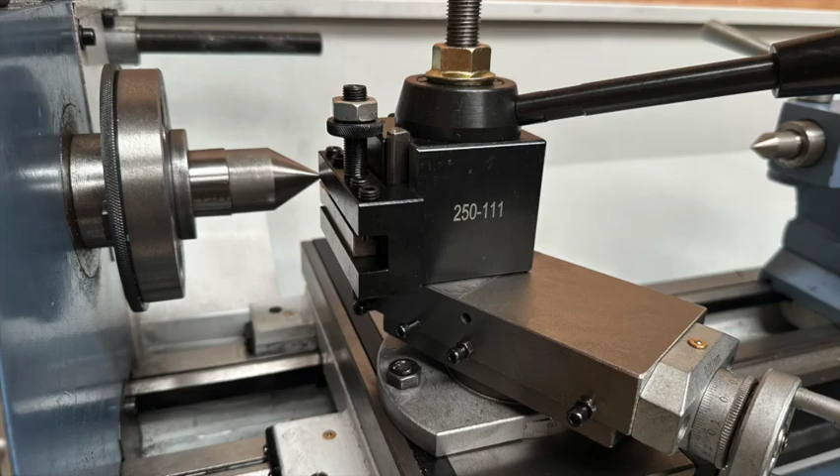Okay, this is my new lathe. I've had it for about a week. Had a lot of fun, put oil everywhere, turned a lot of steel into scrap. Had a lot of fun with it.

But one thing I've learned pretty quickly is that this tool post that comes with it is a pest, particularly for beginners. I think if you could just get your tools in there once, shim them up, and maybe if you had more of them so you could take them out and replace them, then that might be a reasonable solution. But for me, I've had a terrible time with it. I've broken a few pieces of high-speed steel every time I regrind it and put it back in. I have to get it back on level with the lathe, and that means shimming again, and it's just a real pain. Do that 10 times and I'm sick of it.

So I know now that I want a quick change tool post. Fortunately, I bought one, but now I need to make it fit. There's a bit involved with that, and like a lot of these things, you end up going down a rabbit hole in order to achieve what you need to do. So let's have a look what the problem is.

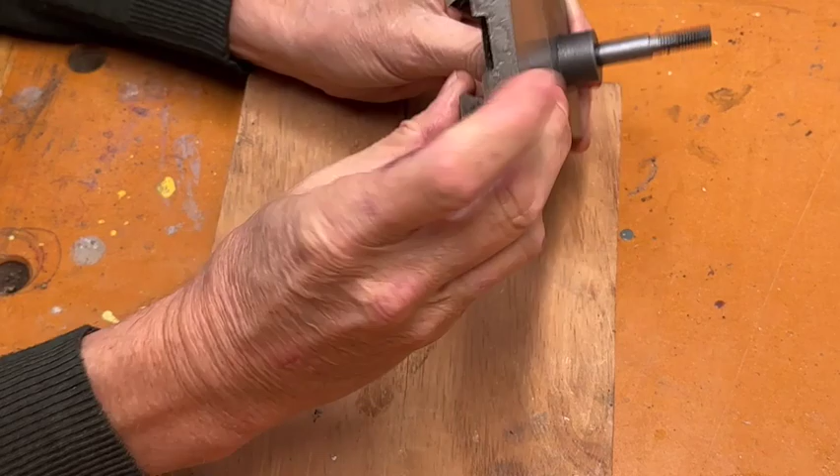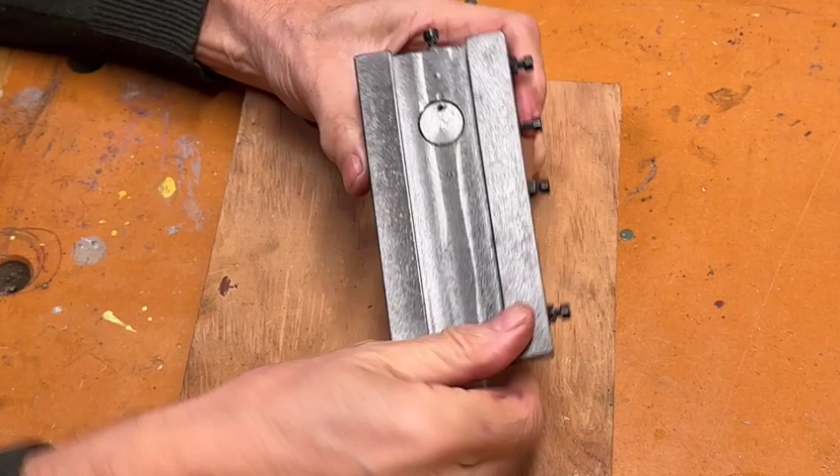Okay, so I took the compound off, and here it is, complete with the dovetail underneath, as we can see. Now the tool post that it comes with obviously registers on this piece here, this cylindrical piece, and the post through the middle is 10 millimeters in diameter, and it's necked down to a smaller thread. Under the bottom here, it's been recessed. That's a 19 millimeter diameter recess. It goes in 4 millimeters, and that's obviously coming into the base of this. That's taking some of the strength out of it.

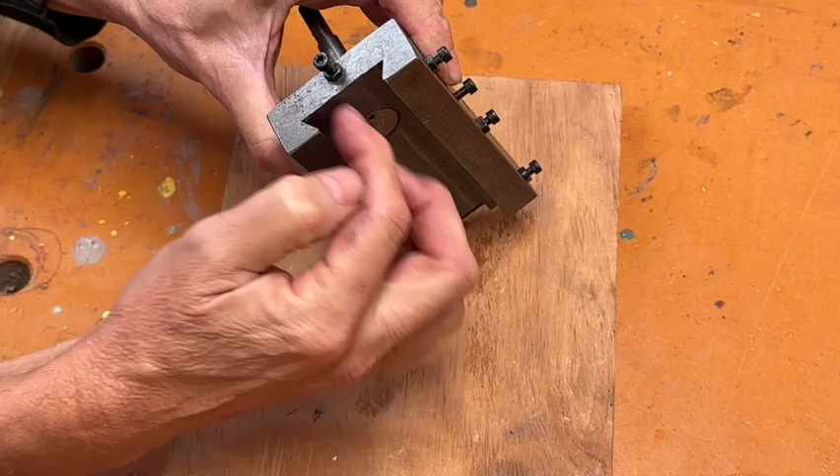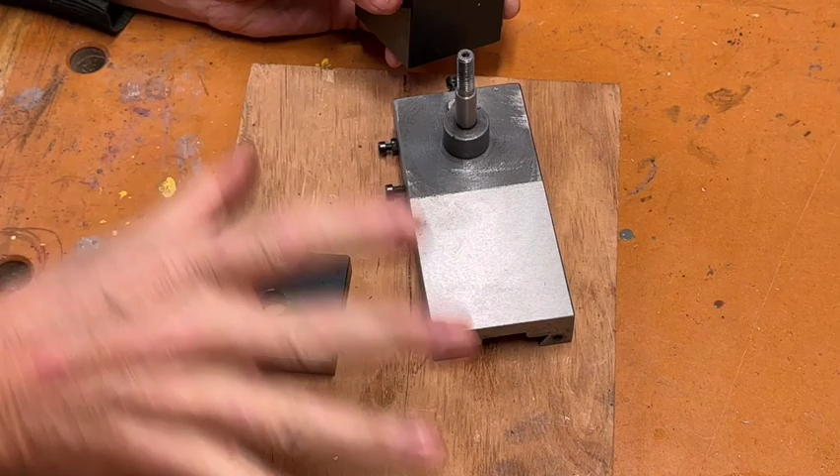Now, the tool post that I've bought is the AXA. This is the correct one for the size of the lathe that I have. Now this comes with this piece that you're supposed to turn into a T-nut for a compound slide that has the ability to slide the T-nut in. This is obviously too small and it doesn't come in that setup. So that there for me isn't required.

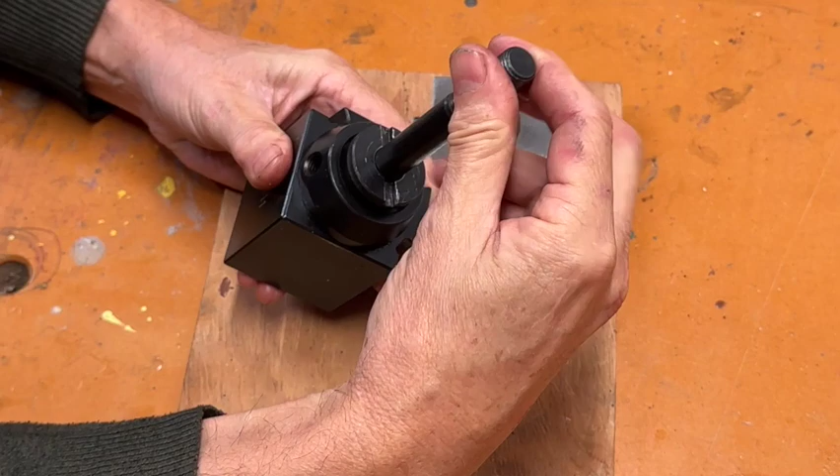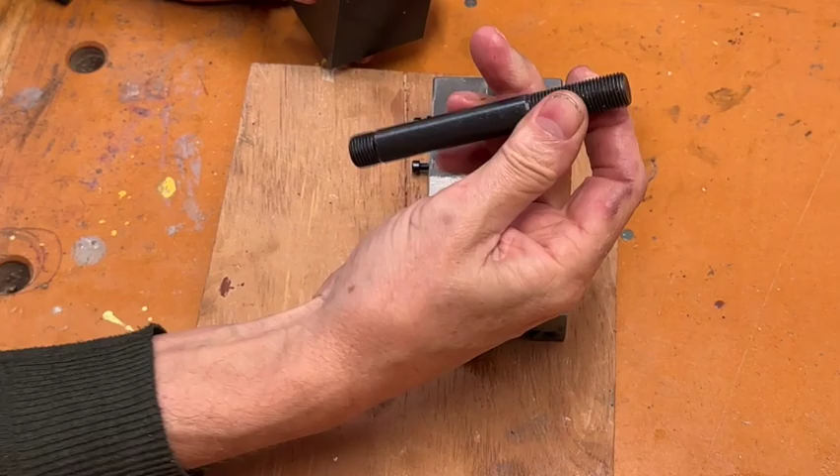I've undone this a little bit so it's not complete, but we can see that the main post down through the middle that the tool post is both clamped down with and registers with is considerably thicker, and in actual fact that's 9/16. So this, even though it's a Chinese copy, is a copy of an Aloris tool post, which is an American company, so therefore this is imperial measures or American measures. The thread is a 9/16 18 thread.

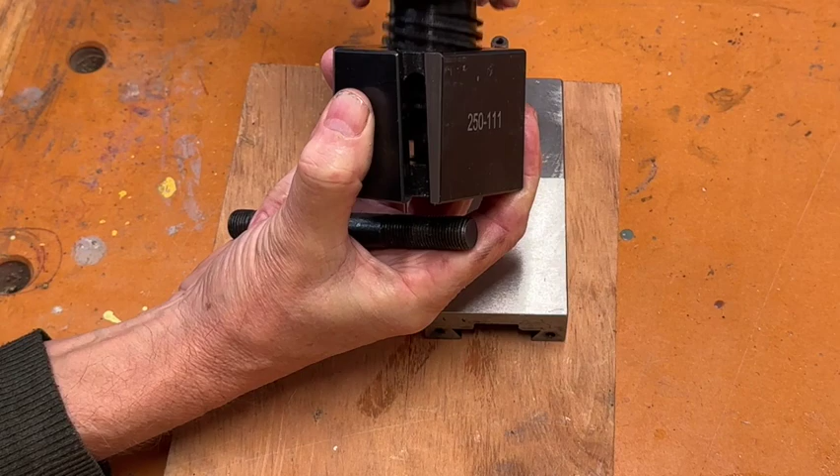So there's a few things that come with this. With the bottom here where it screws in, hopefully you can see that, this threads all the way to the bottom and it holds this spiral piece in that the sliding dovetails work against. So the center piece has to screw into the bottom.

So I can't take away that in order to make room for that, so it won't sit on it. So this, as it stands, sits proud. This is 22 millimeters, I think, and that's not. I can't remember the size of it, but you get the point. So I can't take this away, so this has to come off.

Now, this obviously is what it would register on as it stands. It's not great, there's a little bit of play there, but it's fine. I don't know if it's really an issue anyway. I don't know if it really needs to register on it, but I figure that if I can make it that it does, then why not? So that's my standard thinking at the moment.

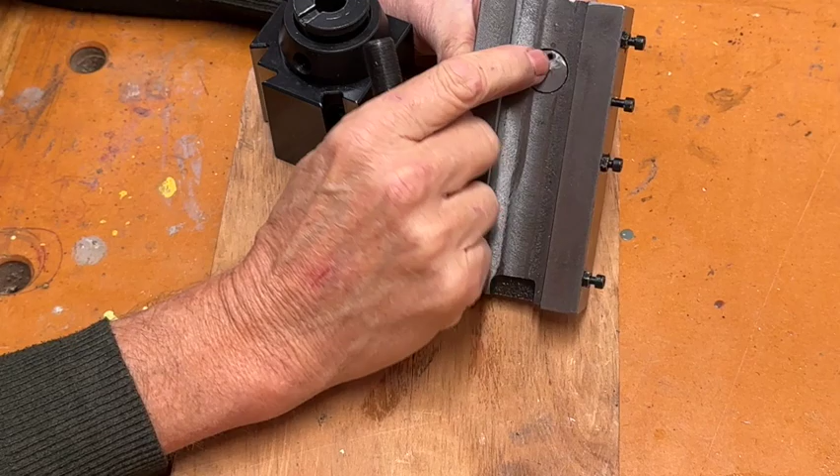I'm going to make a bigger hole for this, make a new pin. So the hole will be bigger for that to fit through. And then because that's 19 mil and this is 9/16, which is close to 14 millimeters, there wouldn't really be enough. This roll pin here is designed to stop that rotating, obviously.

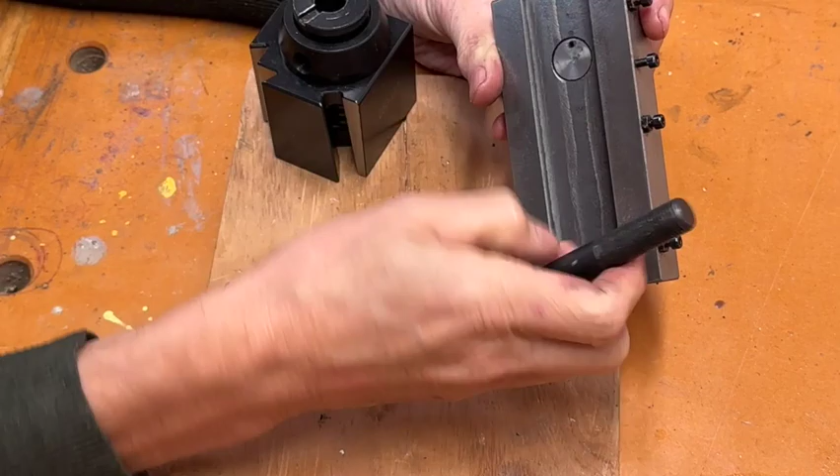So what I really need to do is make this recess here bigger, and I'm going with about 24 millimeters. It'll just give me enough room. There's about 35 in between the bottom of the dovetails. So I'm going with about 24 millimeters, and I'll show you why in a minute. And a new pin that will go through, and everything else will be the same.

The only other difference I'm going to make is I want this to be 9/16 because it needs to fit inside here and register on it or thereabouts. But the rest of my lathe is metric.

Living where I do, everything's metric. Everything else on the lathe's metric. I want to just neck it down very slightly and put a 14mm fine thread on it.

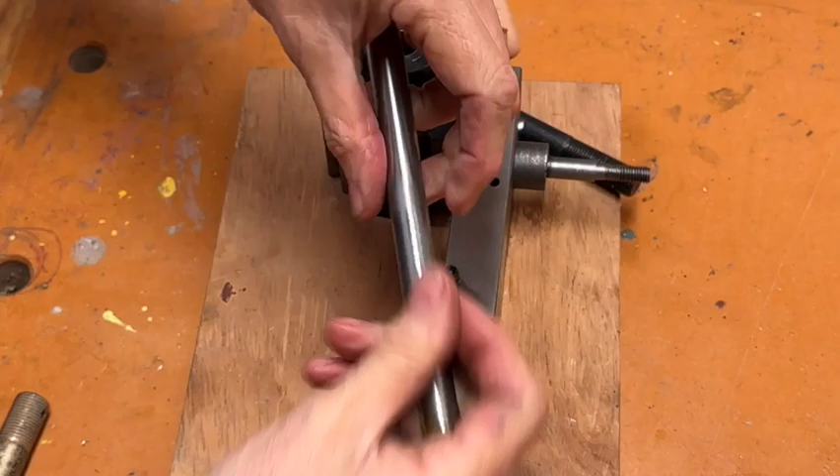Now what I haven't shown is I've jumped ahead and started making the pin. I haven't threaded it yet. This started out as an old bolt.

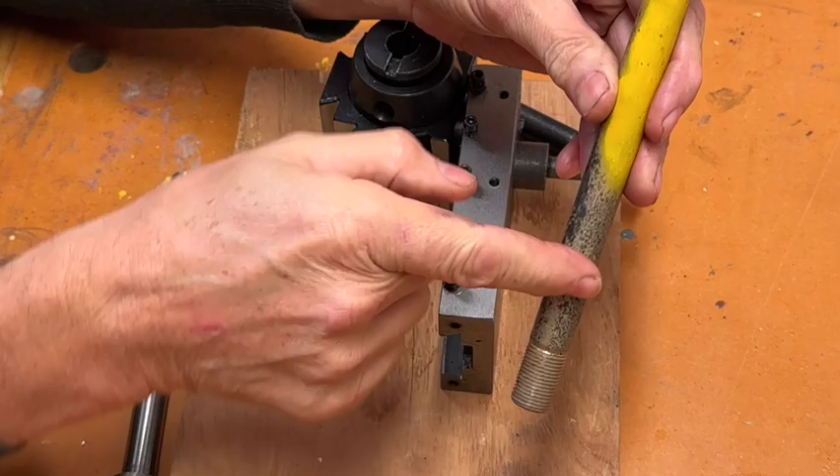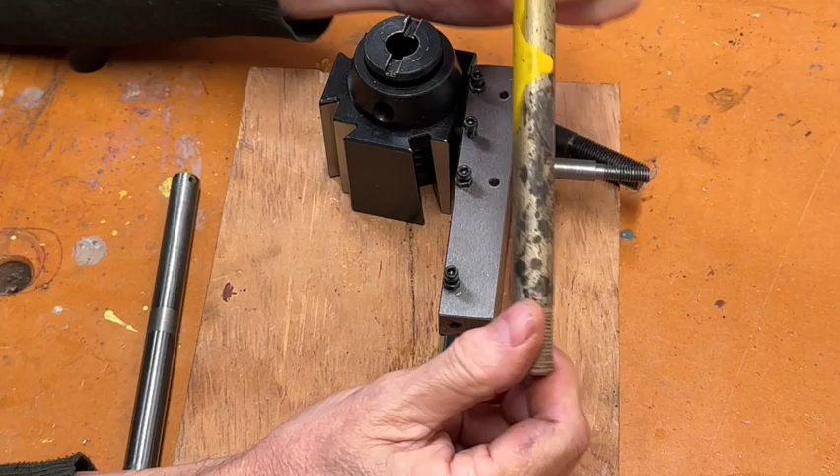This bolt, just for interest's sake, used to hold the wing of an aeroplane on. When they took the wings off and pulled this pin out, the person who did it used a screwdriver or some form of lever to lever the pin out. Before it's inserted back into an aeroplane, it needs a magnetic particle inspection to make sure it's still suitable. This one failed. I've got 5 or 6 of these, and they'd all failed.

So I thought, well, that's a great bit of material I can use for something else. And as it turns out, it worked out quite well for this pin. So that's where my 24mm comes from. When I round that off, just take the corners off, it leaves me with about 24mm. And that now is 9/16 to go through the middle of here for this to sit on. It sits quite nicely with very little slop.

In fact, it's slightly better than the pin that it came with. I'm just waiting for a new nut to turn up. I don't have any thread wires at the moment either. This is the problem with starting with these things, is you don't have a lot of stuff. So I'm just going to cut it and make sure the nut fits. Even though that's probably not what you're supposed to do, that's all I'm going to do on that.

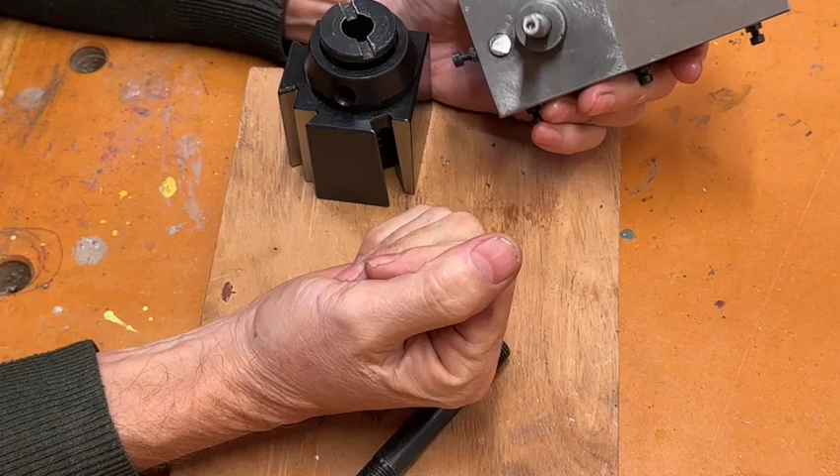So the problem now is, how am I going to do this? Obviously, if I take this out and mount it onto the faceplate in my lathe, I don't have a tool post, so I can't do anything apart from drill a hole. Of course I could take it to somebody to do it for me, but where's the fun in that, right?

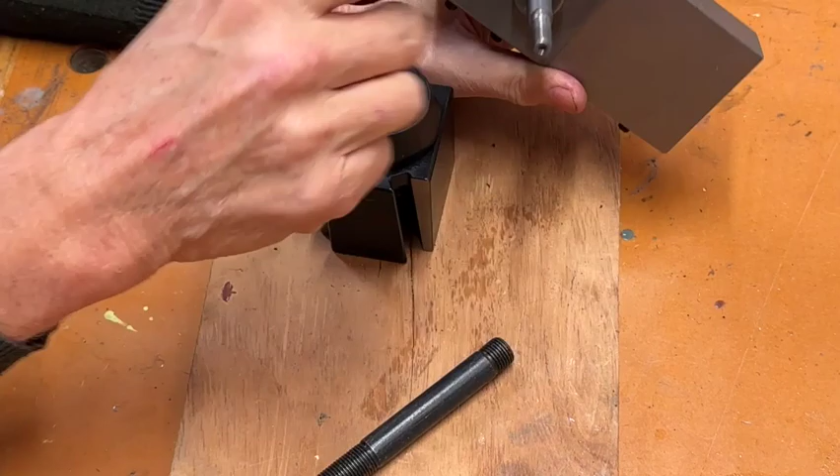So I've seen a few people on the internet who have done away with the compound slide in an effort to increase rigidity. That made me think it would be an ideal thing to make first, because I can make that relatively easily, and then I'll have somewhere to mount my tool post, so I'll be able to work on the compound slide on my faceplate, machine this down myself, machine the recess myself, and make it all fit together.

It was all getting a little bit too complicated for my head, so I decided I'll put it onto CAD on the computer so I can have a decent look at how all this is going on, and then I can formulate a plan to move ahead. So let's go to the computer and we'll see what I've come up with.

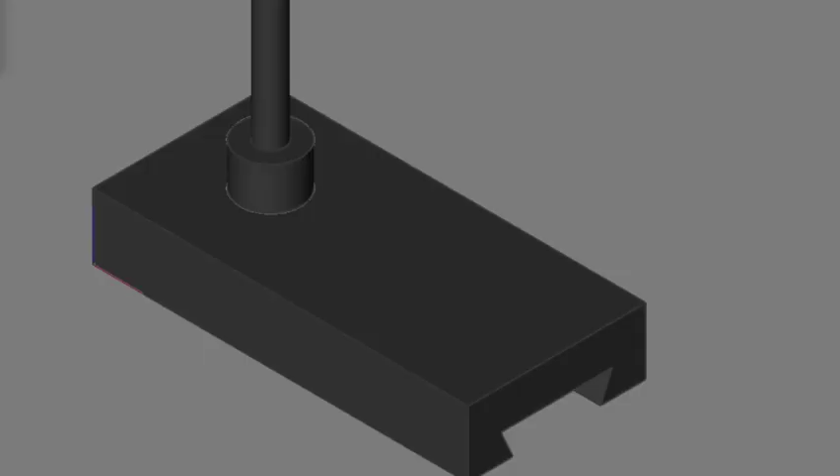Okay, so here we can see the compound slide as I've drawn it up. The pin's now removed, and we can see how I'm going to shorten the registration post, if you want to call it, down to about 2.5mm.

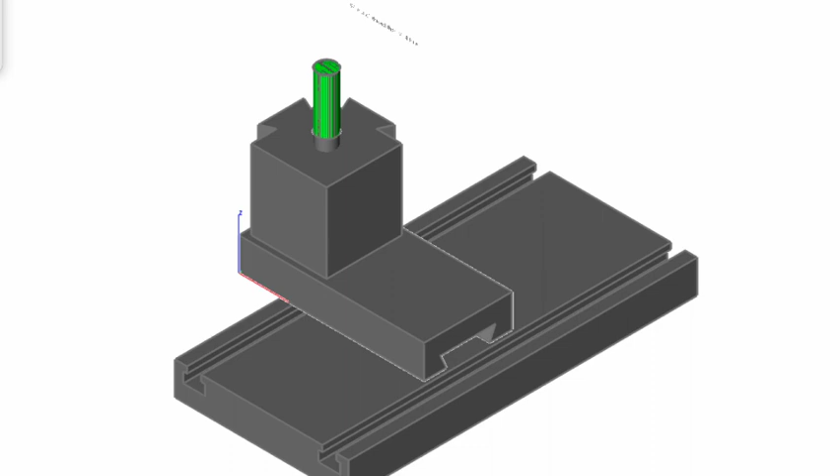Okay, now this is what it's going to look like completed, and the cross slide's in there for comparison. Now, obviously with the compound slide removed, I'm going to need some form of tool post. So let's remove some of the components and we'll see what I've got planned to build a replacement for the compound slide.

So here it is again with the compound slide removed. Looking from the side, we can see the cross slide and the quick change tool post, and we've got about 50mm, in fact just a fraction more than that, in between. So my plan is to split that up and make 2 pieces.

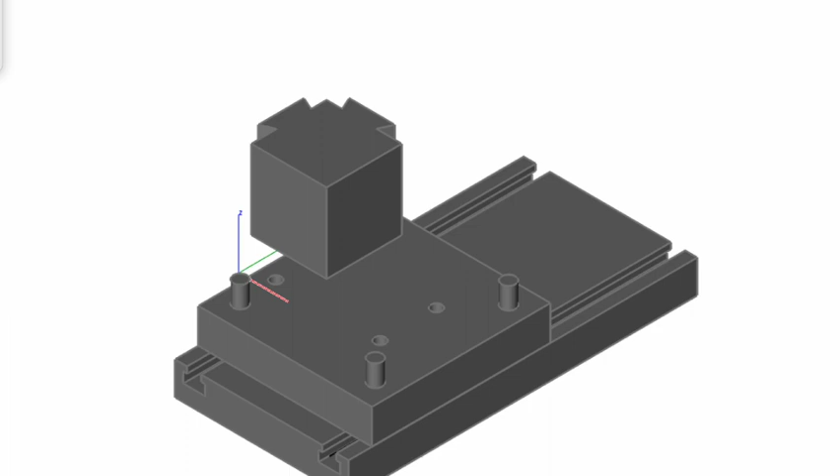So here we have a bottom piece with the holes for attachment, and that'll be joined with another piece above it. So we've got 4 corners that have attachment pins going through, and they're basically just bolts that are adjusted to fit as T-nuts.

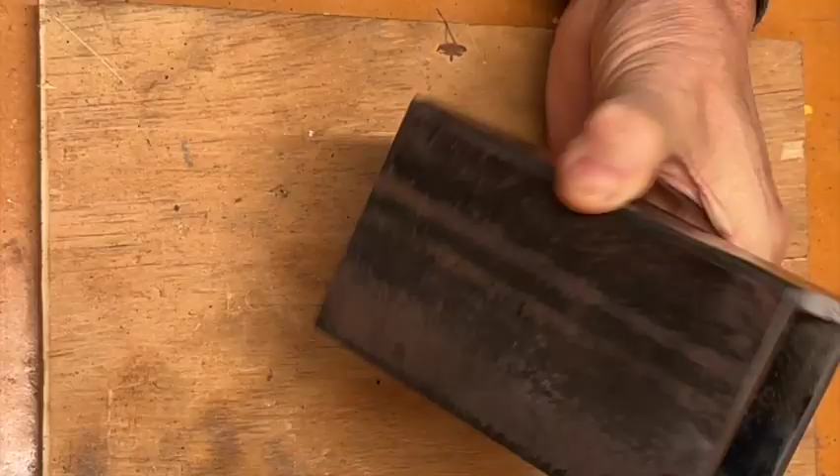Well, that was the plan until I realised that I couldn't get any 25mm steel very easily. So I'm just going to redesign that slightly, but for now I've just made this temporary tool post holder, I guess you'd call it, and I've just used 5mm angle and welded it together.

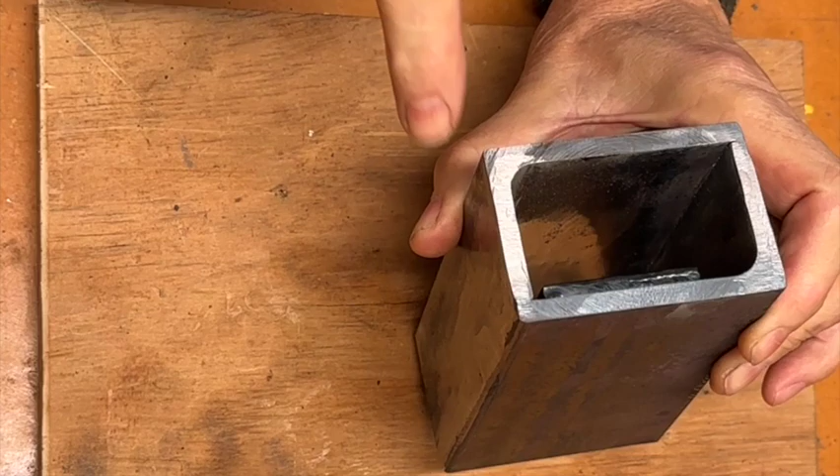So a few learning aspects there. One of them, my welder's not the gruntiest, so I had to pause quite a bit on the welding, and I'm not a welder by any stretch. You can see that I didn't quite get the penetration that I would have liked in here. In that corner there's down to about half, which wasn't that great. Most of it's actually not bad, but that was down a bit, and I also ran out a little bit of argon just towards the end, so got a little bit of spotting there.

I welded a couple of plates in here just so when I drill and tap that, it's got something to bite into rather than trying to sit half in and half out. So that should be okay, I think.

How rigid this is going to be, I don't know. My intent, after I've drilled the holes for it to mount on, is to also weld in a piece kind of like that, it'll be further in. I think I'll probably have to angle that and just put that in there and weld it in, just to give it a little bit of rigidity, sort of in that plane, whatever plane that might be.

I tried putting it in the lathe and indicating on the 4-jaw chuck to get this face even, but I realised the welding had hardened the edges, so every time I got out to the end points, it'd smash the tips off the high-speed steel. And I've also been told that it's not a good idea to do it with carbide because carbide's brittle anyhow.

So that didn't work. Anyhow, I got it a little bit truer there, and I really need to cut about 5mm off this end here and reshape it. So I'll just have to do that with the angle grinder. Like I say, it's only temporary anyway. I'll tidy it up a little bit as time goes on, but for now, that'll just have to do.

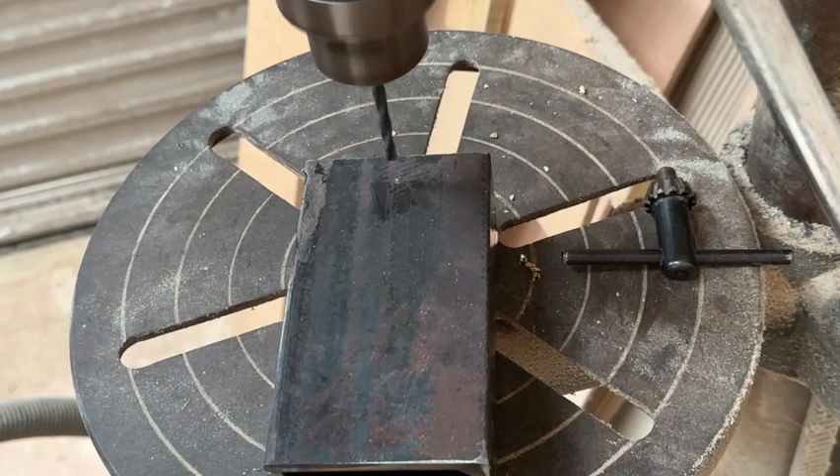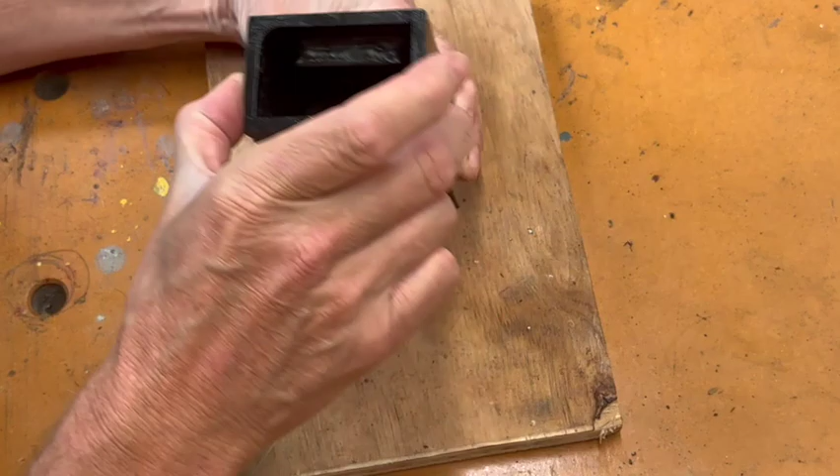Okay, so this is a little bit further down the line. I've welded this up, I've got this piece in the back welded in. I just sprayed some black on there because I've just been away for a few weeks and I just didn't want it to corrode. So I put this in the lathe and the 4-jaw chuck just to level that up and true it up a bit.

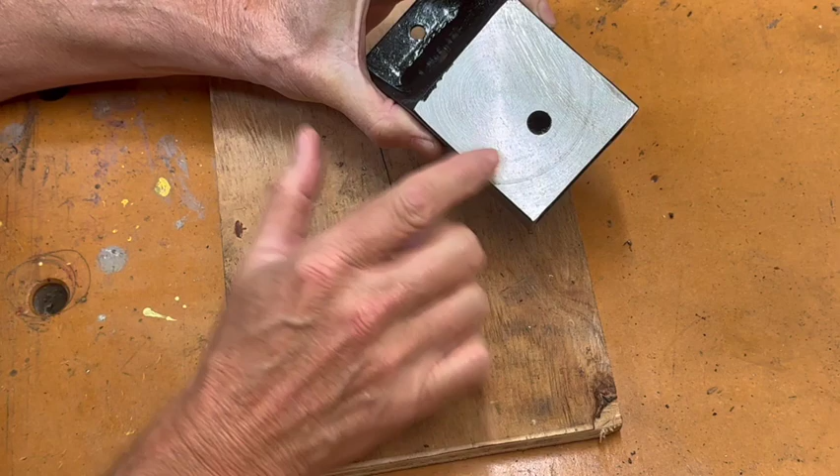Had a little bit of trouble with these corners because they were quite hard. So I just left a few small marks on there, but generally the finish isn't too bad for what it is. Bottom I haven't done yet.

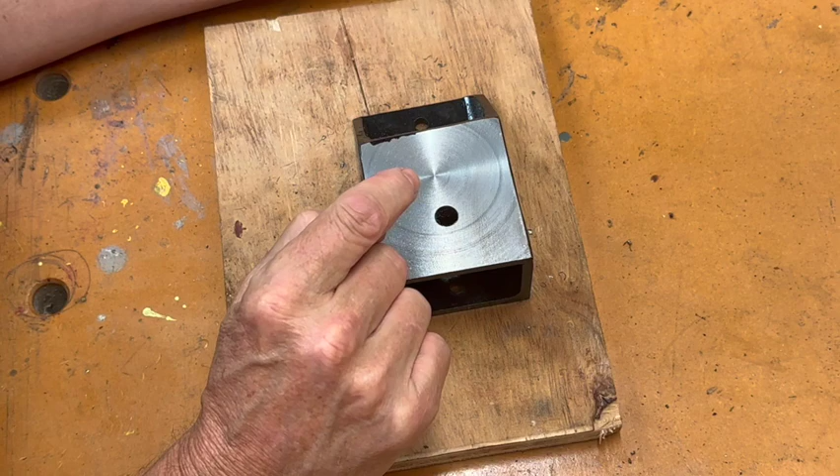Not quite sure how I'm going to attack that, but what I am going to do in here is tap that for a 10mm, M10 bolt and just cut it off, so I've got a small pin because that'll fit into a recess in the cross slide. In the top here, of course, I need to tap this now for a 9/16 18 so I can put the tool post centre pin in, and I think that will be reasonably rigid.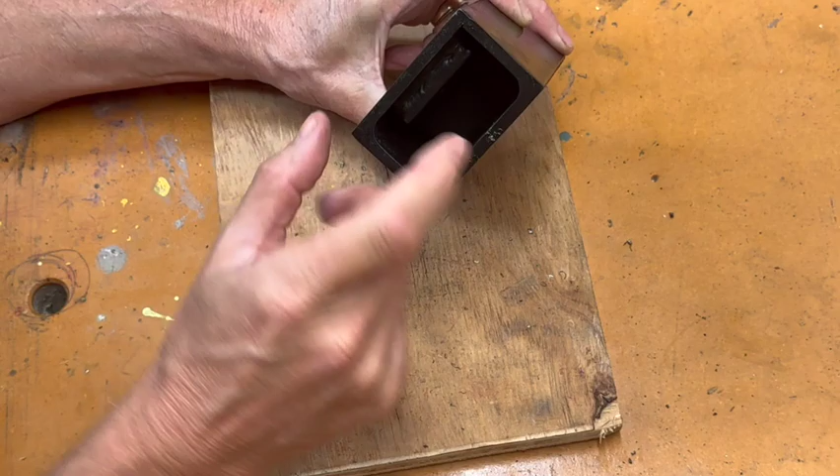I'm not quite sure. In the front here it's still a bit hollow. It's fairly solid and heavy, but it may lose a little bit of rigidity with that. It'll be a little bit difficult to do much with it just because the holes that mount it onto the cross slide will be in the way with the nuts, so I can't really do a lot with it. I could perhaps put a small piece in there that might improve it, but again, this is really only a temporary solution, so we'll see how it works out.

It should give me enough rigidity to get the job done just to fix the compound, and so I can put the tool post on there, but we'll see how that works out. In the meantime, I'll get on with tapping that and continuing on.

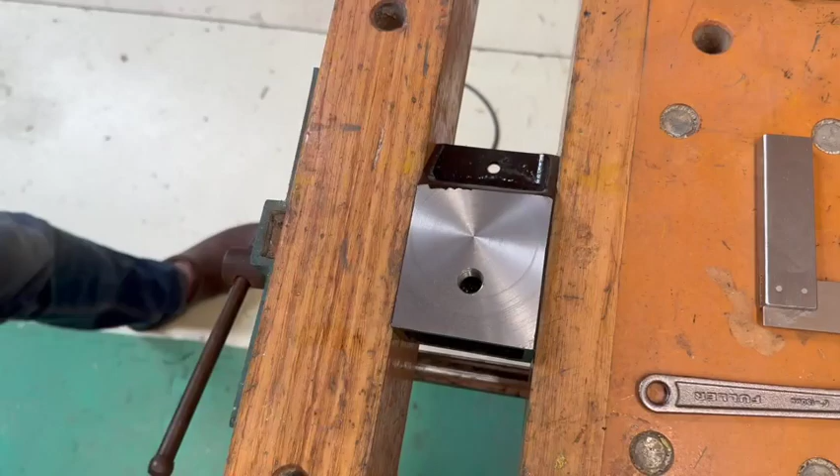It looks like that'll work. Okay, so here we are now, and I've mounted the compound to my faceplate and made a couple of little pieces of fixturing equipment there. So I've got this strap here to hold it in place. I've got it approximately in the middle at the moment. I'll dial that in when it's sitting on the lathe. And I've just made this little piece of strap here with a cutout just to stop this from flopping around.

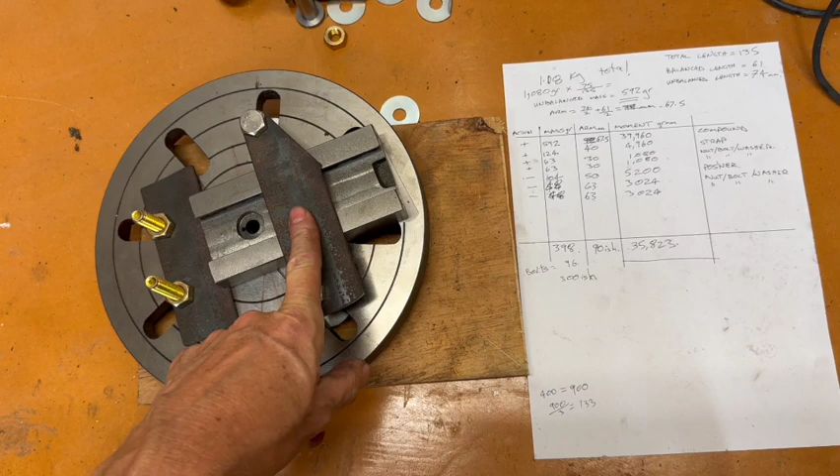Now, of course, the load of this, when it's spinning around, is going to want to try and pull itself out. So I'm going to have to run it fairly slowly. I can't really come up with a simple method of holding this in without adding even more weight on this side. So I'm just going to see how I go. I'll just run it slowly and make sure it doesn't jump itself out. If it looks like it's going to move, then I'm going to have to change the system. But this is the start.

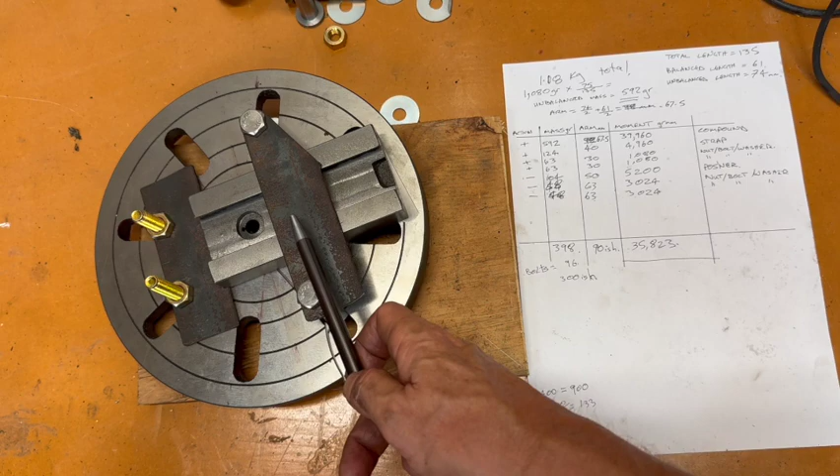Now, of course, I have to balance it. So I've just come up with this old-fashioned spreadsheet. I've measured the weight of the compound and put that up there, 1.08 kilograms or 1,080 grams. I've measured it and got an approximate position. Now, this side of the center and the same out here is balanced. So I'm really only interested in the weight from about here out to the end of the unbalancing weight, if you like, along with this strap. And this strap here is helping things because it's on the other side of the center.

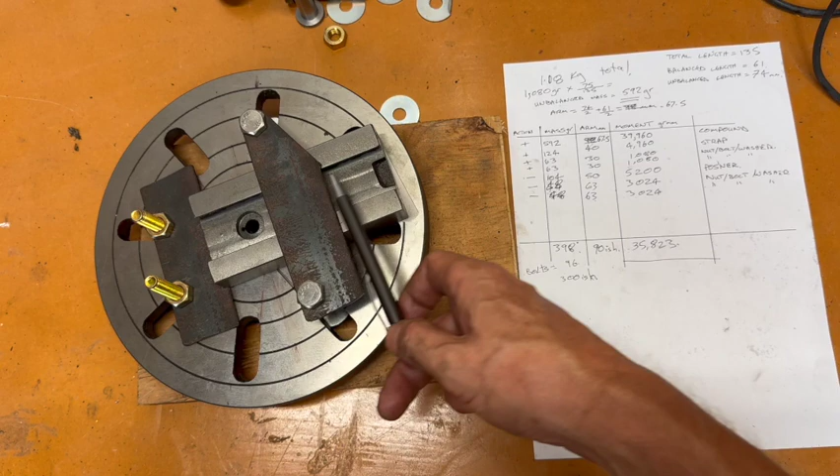So this sheet here is pretty simple. It's just got the mass of each of the components and the arm from the center of gravity approximately, and I just figure out the moment so we can either add or subtract depending on which side of the center of gravity it's on. Come out with the total moment, and then I'll be putting something out here, about 90 from the center roughly. And so I need about 398 grams out there, which is just dividing the moment by the distance.

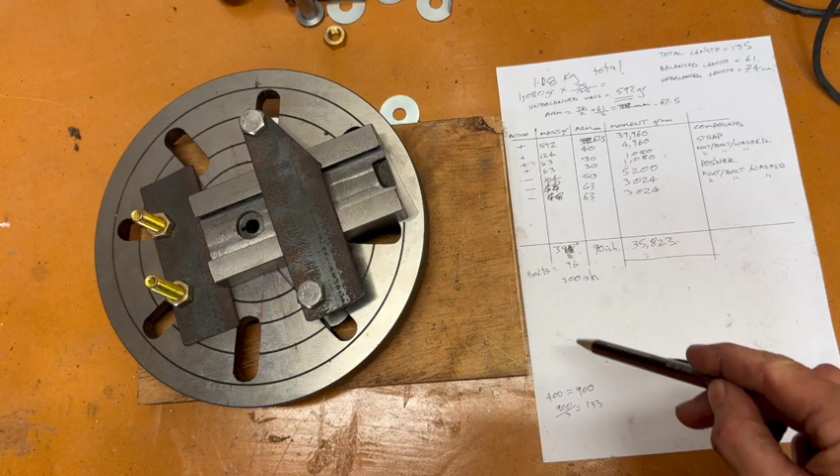Now the bolts and the nuts are going to be around about 96, so about 300. I'm not trying to send a rocket to the moon here, so it doesn't really matter. I just want it approximately balanced so it doesn't try and shake the lathe off the bench. So I've got a piece of material I'm just cutting at the moment. That should give me around about the weight I need, and I can bolt that out there, and then we'll move on to the lathe and get it all dialed in.

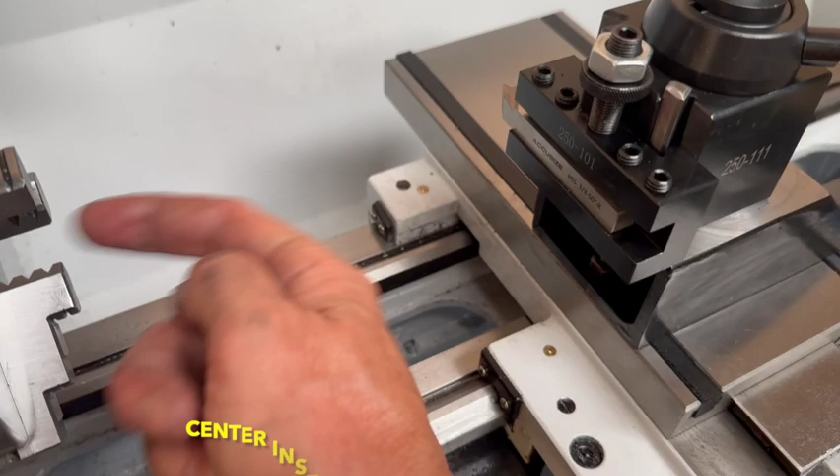Right, here's my temporary tool post in position, and I have the center pin in here, which you can't see, but it's holding that in place. I've got that squared up and mounted the tool post on it. I've also put in a tool here and measured the height. I put the center in the spindle and got the height off that for now, so that'll do. This is only temporarily in place anyway. The next tool I'll be using will be the boring bar to get the center of the compound slide machined out.

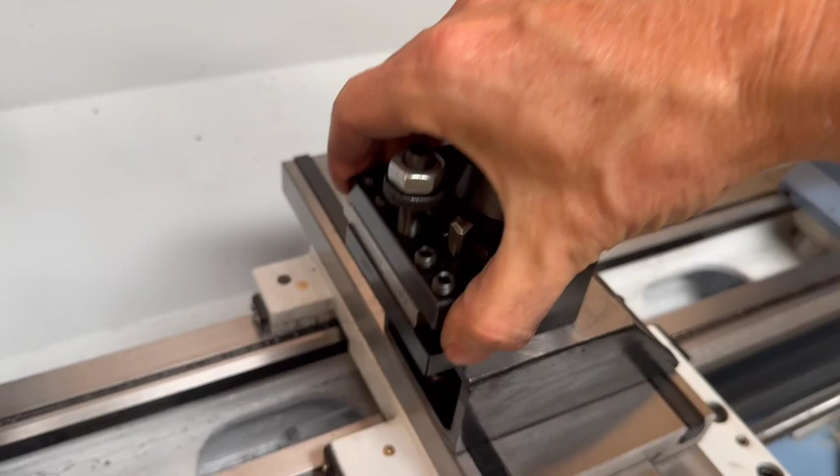It seems to work. I like it so far, and there's just enough room at the bottom there, about 3 millimeters or so. I've got a 10 millimeter tool in here, and I want to use 12 millimeter tools. So hopefully that'll work out, and I'll be able to use my 12 millimeter tools in here, give it a little bit more rigidity. So we'll see how that goes, but so far so good.

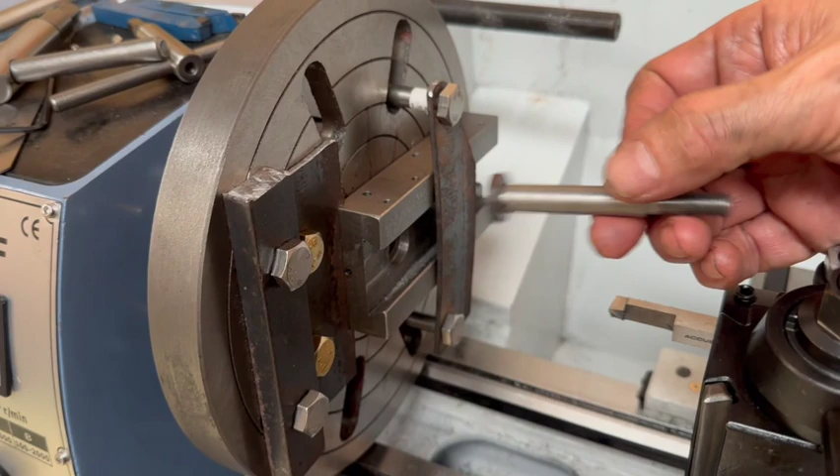Now here's the setup. I've got it pretty much dialed in, the best I could find. The pin that I had, this outside piece, I was trying to indicate off that, but turns out that's not concentric with the base of the pin, which was a bit of a nuisance.

So I had to move things slightly. The other thing that makes it a little bit awkward is that this pin is slightly stepped. You can just see it there. The top piece is a very slightly smaller diameter than the bottom. So with all of this carry-on sitting in here, if I wanted to have it sitting out a reasonable amount, there was a bit of movement with it. So I had to have it in quite close.

It was quite difficult to actually get the gauge in there with all of this mounting bracket and everything. But anyhow, I think I've got it. I certainly hope I have. And I've just touched off in there and brought it back out just to double check that nothing was moving. It certainly looks okay so far. I'm running it quite slow, so I'll see if I can find somewhere to mount the camera and give you a quick look.

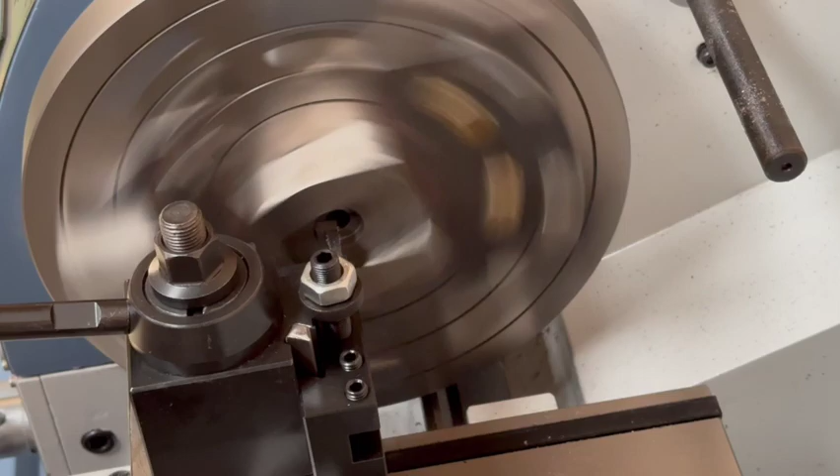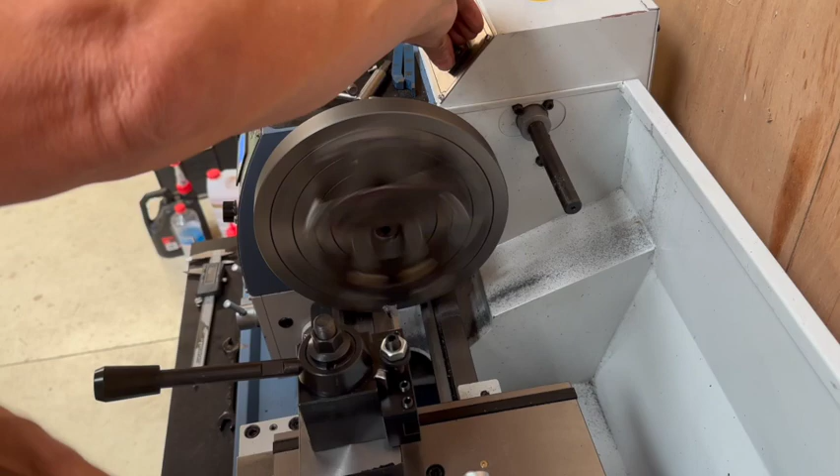I'm taking very small cuts and doing it very slowly, so this is going to take a while. So I'll come back when I've done a bit more. That is really nice. I'm happy with that. So now I probably just need to take the burr off the edge here. And next thing, we'll drill the hole. Or at least I'll probably end up boring the hole actually, but not with that boring bit because it's not going to fit.

Right, so here we've got the boring bar in there now and bringing out the centre to the correct diameter for the new pin. Slow process again. I'm also running it way slower than it should be for the carbide tip, but again I just don't want any of the stuff to move, so I'm just taking it really gently. Very small cuts, very little pressure on anything. Right, let's have a quick measure of this. Yeah, we've still got a ways to go, around about 0.8 of a millimetre.

Alright, well here it is. I've got to say it came out bigger than I wanted. I just slightly overcooked it. It's not much, but there's just a tiny bit of play in there which I don't really like. But anyway, I've got that now. If I'm not happy with it, I can always make another pin with a slightly larger base just right in the bottom. But anyway, for now, I'm going to cut most of that off with a hacksaw and then mount it back in and just trim that off so it's level. And then we'll see how that goes. But we're getting there anyway.

So here's the setup here. Because I couldn't get the throw on the cross slide, I'm actually having to use the boring bar. It's not quite how I wanted to do it, but this will just have to do for now. We'll just cut the top off with the hacksaw, and now just the very last bit. Okay, here it is so far, just a test fit. So generally pretty happy with it. Could have been a little bit better in a couple of spots, but I think that'll be quite functional. So I've got to put the roll pin in. I won't bore you with that piece, I'll just do that in the drill press. And I'll come back to you when I've finished it.

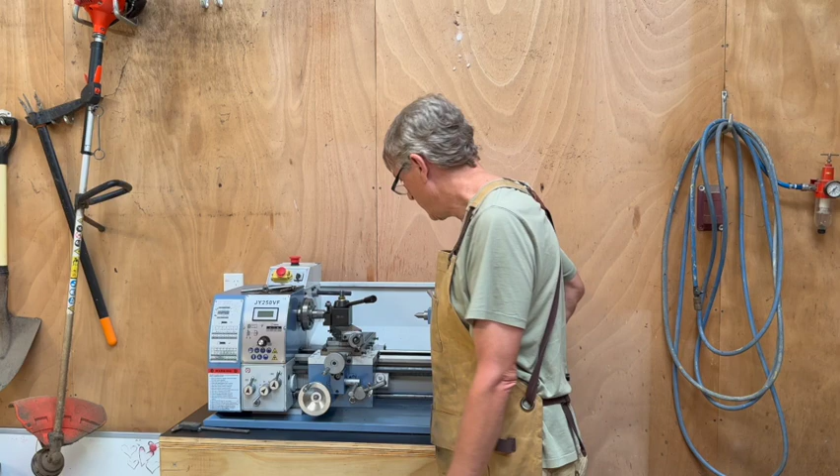One thing with it, I just made it fractionally taller. It's probably about a millimetre too high, so I need to come up with some method of flattening this base plate and getting it down to the same height, so these can be quick change without having to change the height on them when I change from a compound slide to this monstrosity. However, I've learned quite a bit. It's been a lot of fun. It's come out pretty good. A couple of little minor mistakes here and there, but generally pretty happy with the result.